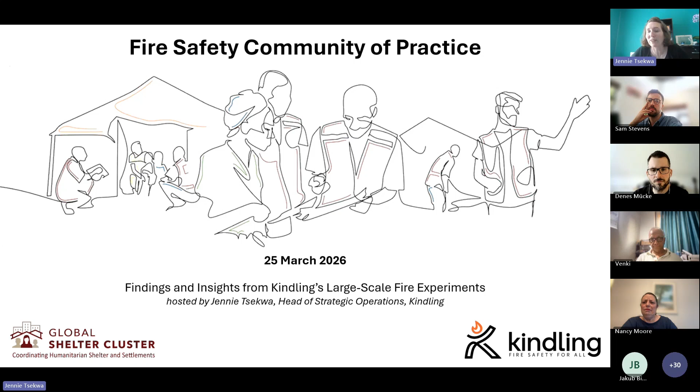Our director and founder, Danielle Antonellis, sends her sincere apologies. She's very sad that she's not able to be here today. She's unfortunately recovering in hospital after emergency surgery yesterday. Thankfully, she's doing very well, but she's unfortunately not able to be here today.

Just to quickly dive in, a little bit about the purpose of this community of practice: for those of you, like I said, who it's your first time, or for those of us who have been here for a while, just to remind ourselves, it's meant to be a space for collaboration. It's designed to bring together professionals from a wide range of disciplines within the humanitarian sector, as well as fire safety and fire protection researchers and practitioners. It was exciting seeing the many different places and disciplines you come from as you were signing up, and it really does feel that that mission of creating a space for these different disciplines is really happening today in a very real way.

So you will see, and Sam will say a little bit more about it, but whenever we give a presentation like this, we're always balancing the socio-technical aspects of the work. This particular COP is going to be a bit more on the technical side. I'm very excited for Sam to dive into the technicalities of the experiments.

We just give you that little bit of a disclaimer up front that for some of you, it might be your bread and butter, what you discuss every day. For some of you, it might be very new. But whatever the case, we hope that everyone on the call today will take away something of value.

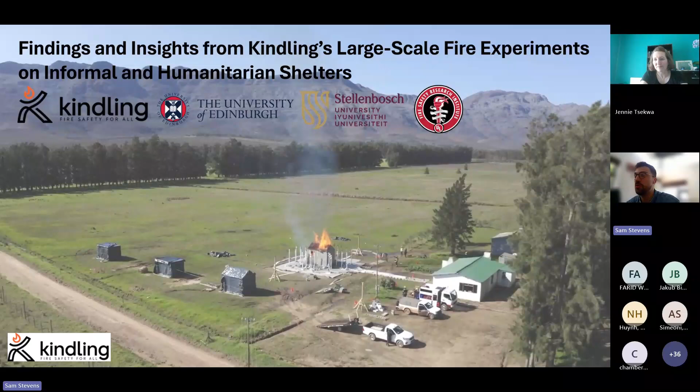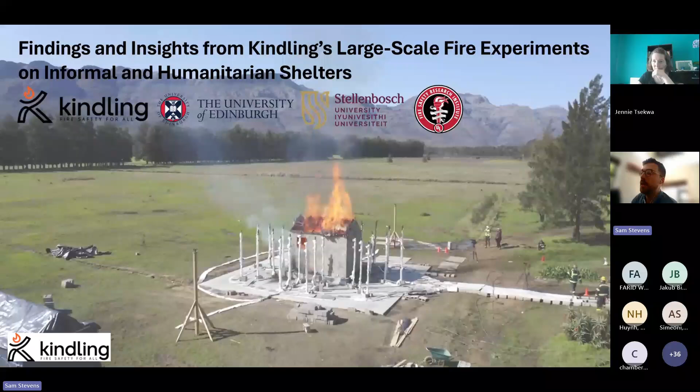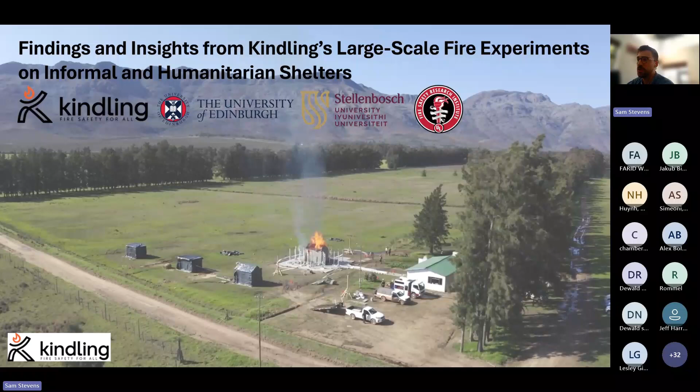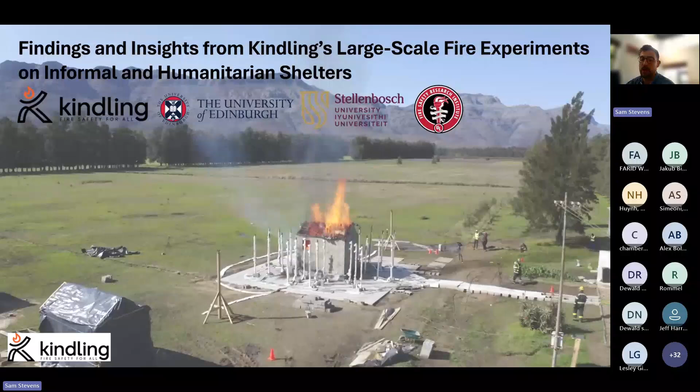This is the beautiful Western Cape, where about two years ago, maybe 18 months ago, we actually ran the bulk of our large-scale fire experiment program. This was led by Kindling, but it wouldn't have happened without key collaborators. We worked with Dave Rush from the University of Edinburgh—I think he's on the call—who was instrumental in planning the experiments and getting them off the ground. A huge number of people from Stellenbosch University were involved, including undergrad and PhD students, and Prof. Richard Walls from Stellenbosch, who was key in helping us source a lot of the instrumentation. And of course FSRI, who funded this work—we're very grateful to them. None of this would have happened without their support, both financially and in terms of all the work happening with informal settlements and the developing world more generally.

As Jennie's already mentioned, there's quite a diversity of you on the call, and I'm trying to squeeze a lot in today. So I'm hoping you can bear with me a little, and there'll be moments for some of you on the humanitarian end of the spectrum where it's quite heavy technical fire science that might go over your head a little.

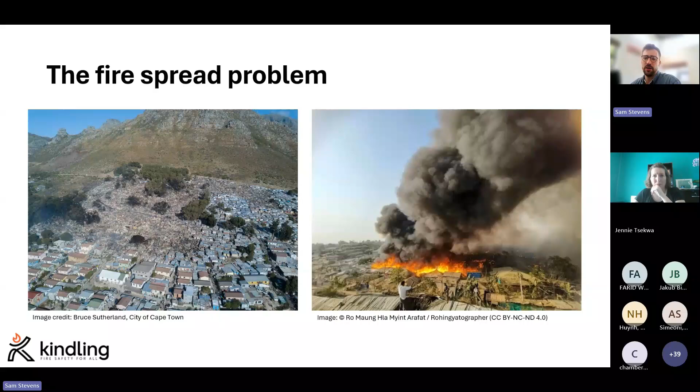Another context is refugee displacement camps, this example being Cox's Bazar in Bangladesh, where we have some of the largest refugee camps in the world, very prone to fires, but a different style of materials - a lot of bamboo materials and tarpaulin being used in that context. Very different to the sheet metal style of shelters we get in Cape Town, but very similar outcomes - mass shelter to shelter fire spread.

The way we conceptualize these experiments - before we can even think about conflagration at the scale of hundreds of shelters, we have to first understand the mechanisms that drive fire spread from one shelter to its immediate neighbors. We conceptualize this through the lens of fire spread risk, broken down into three parts. We need a hazard, which is a thing that can spread fire - in this case, a shelter that's on fire. There are different ways it can spread fire: high levels of thermal radiation, direct flame contact to its neighbors, or through the production and distribution of firebrands or embers, which may float further afield and ignite other shelters not in the immediate vicinity.

For these experiments, we were looking particularly at the short-range spread mechanisms - thermal radiation and flame contact. But just understanding how a shelter burns isn't any indication of whether a fire will spread. You need to know what the exposure condition is - usually how close the shelters are around it, and whether they can be exposed to the hazard shelter. Additionally, how likely is that target shelter to ignite, based on its own material properties and the ignition properties of the material it's made of?

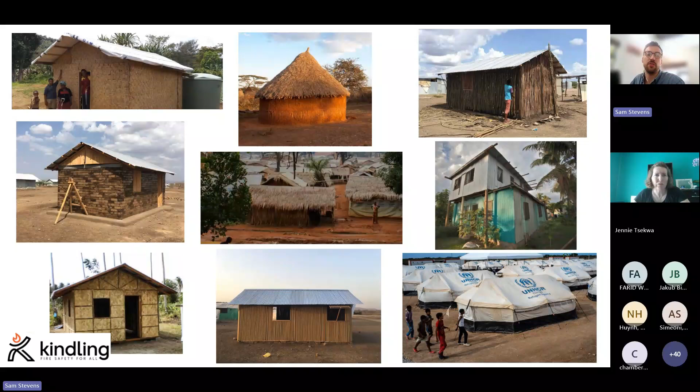So obviously we can't test everything. We're not going to test every single unique style of shelter. So one of the first parts of this work, going back 2 or 3 years, was actually trying to build a database of what shelters are actually out there in terms of materiality. So we spent a lot of time looking through UN reports, IOM reports, and a bunch of different documentation primarily from the humanitarian space that had images of different shelters and data on what materials they're made out of, how many doors and windows they have, how many stories they have, things like this.

We managed to get to a database of just over 450 unique shelters, taken from over 90 countries. So we're not restricted geographically. We've got shelters from Africa, Latin America, Asia. We've even got the refugee camps that we have in Europe captured in the data as well. So I think just about every continent is represented.

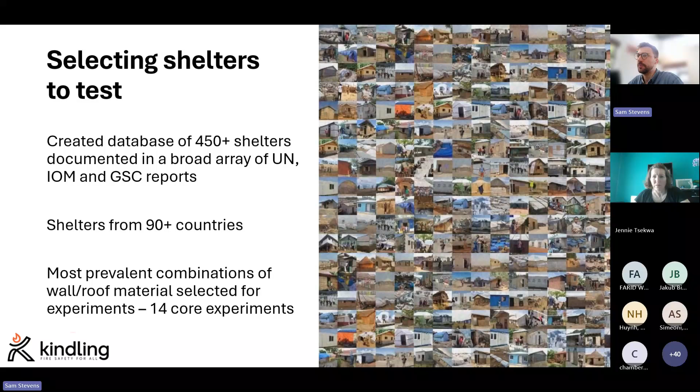And I don't mean the degree of combustibility, I just mean, is it a material that burns? So we have non-combustible wall with non-combustible roof, combustible walls with non-combustible roof, etc., etc.

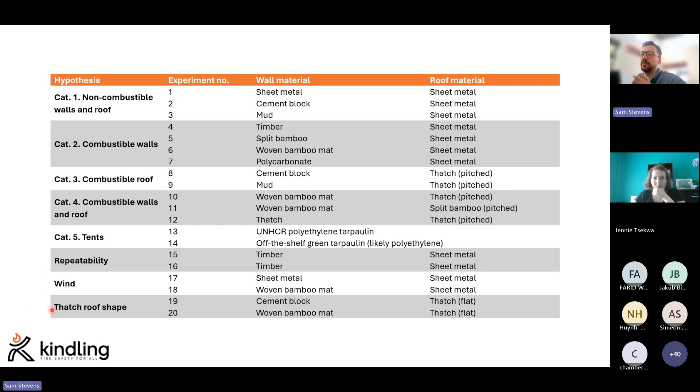And then there's 6 extra experiments that we did, looking at things like experimental repeatability. We had a couple of quite opportunistic experiments on wind, and then this is more of a niche kind of experimental process - how does the shape of a thatched roof affect things? So 20 big shelter experiments in total.

So what does a shelter experiment look like? Well, the first thing you'll notice here - I've been talking about fire spread, but in any single experiment, we were only burning one shelter and measuring lots of things about it. So every shelter had a floor plan of 3.6 meters on the long side by 2.4 meters, and it was 2.4 tall.

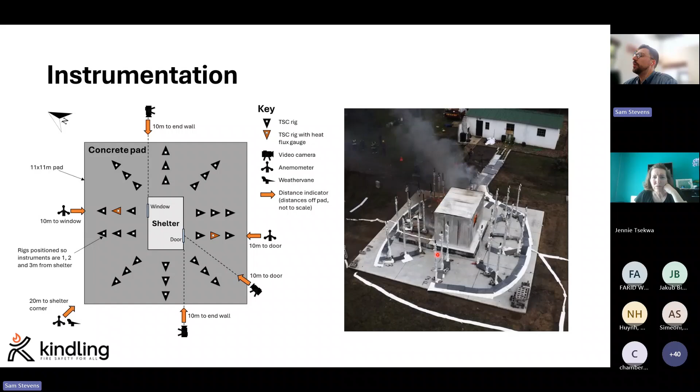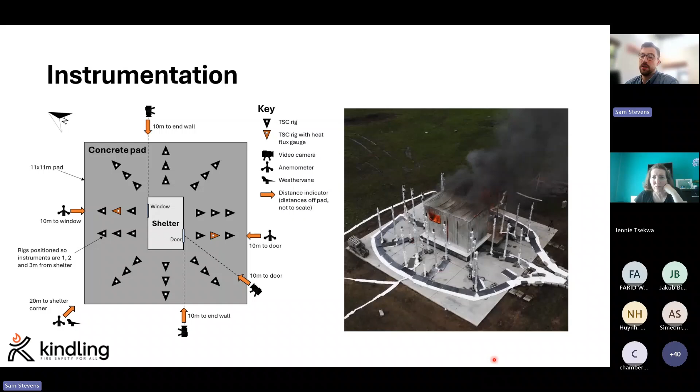They were all positioned on this platform here, which contains a 6-ton capacity scale. So we're measuring the mass of the shelter, which can give us mass loss rate, which roughly can help us analyze how much energy the fire is releasing over time - we call that the heat release rate. But if you're just measuring the mass, it's a bit of an approximation. It's not particularly accurate, but we can't do accurate heat release rate measurements in a big outdoor context.

I'll start with thermocouples. So inside we take a bunch of temperature readings with thermocouples just to understand the growth of the fire within the shelter.

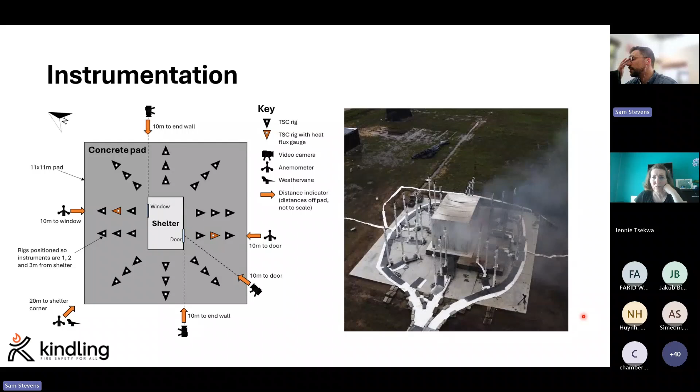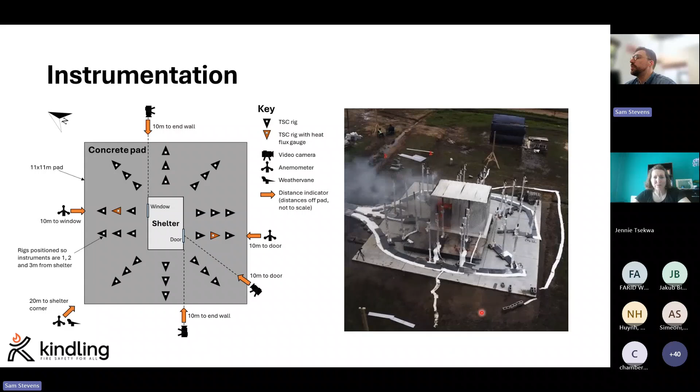Externally, what we're looking at is the dominant part of our test program: these instrumentation rigs here, each of which carry 2 thin-skin calorimeters, for a total of 60 TSCs for the full range of instrumentation. 2 of those are accompanied with heat flux gauges.

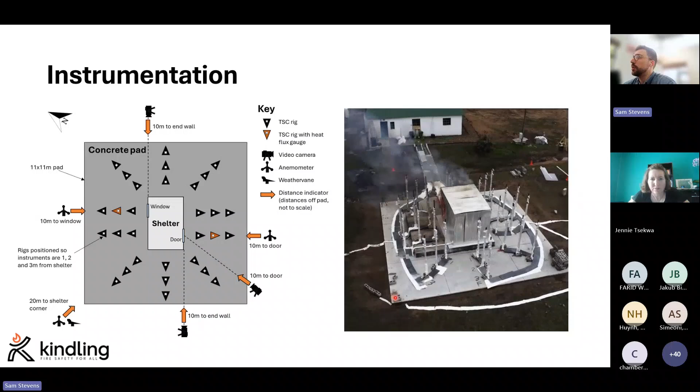And then we had cameras in various positions looking along the axis of a wall to view the flame extension from the openings, and various other cameras just in general views of the shelter as it's burning. The last thing to note, probably not in view at the moment, is we had 3 tall wind measuring instruments.

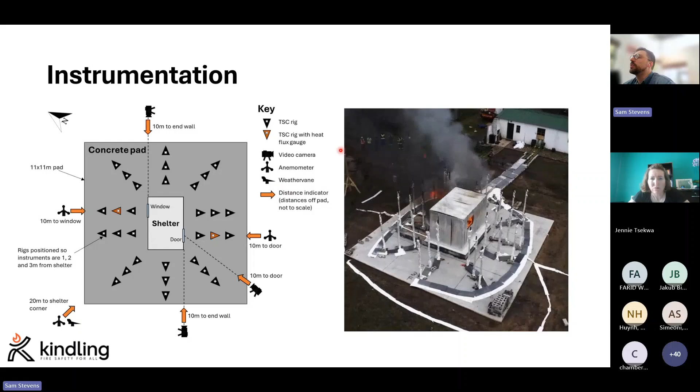One's just coming in here. So we've got devices measuring wind direction and wind speed on these, just in the general field around the shelter as it's burning.

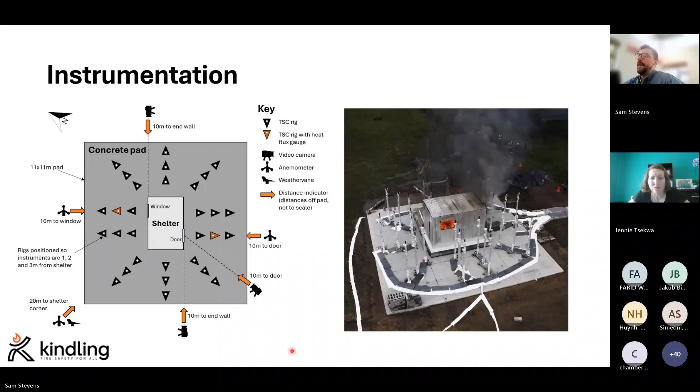So I mentioned these thin skin calorimeters are a core part of the testing program because they measure heat flux, and that's the energy transfer, the rate of energy transfer at these various positions away from the shelter. So if I'm standing in the position of one of these, looking towards the shelter, that's the heat that I receive.

TSCs are, if you're a fire experimentalist, you might be thinking, oh, they can be a bit temperamental, and you're right, they can, but they're cheap and they're easy to mass produce because each one is just a small square of this vermiculite. It's an insulating material with a little stainless steel disc with some thermocouple wire welded to the back. And really, they're not actually measuring heat flux. What they're measuring is the temperature, and then we have to back calculate heat flux once we have the data.

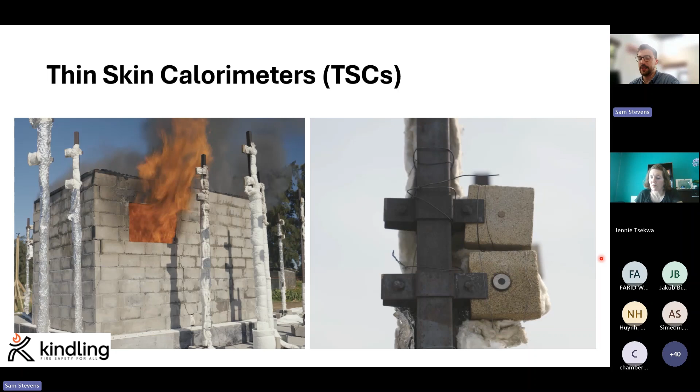Now, one of the critical parts of our program was pairing two of these, one 2 meters away from the window and one 2 meters away from the door, with a heat flux gauge. So we're equating the two and saying at this position, the heat flux that the heat flux gauge receives, and it's quite a high fidelity reading, is effectively equivalent to what the TSC is going to be seeing. In a moment, I'll explain how we then calibrated our entire TSC set to the heat flux gauge data.

The reason for this, and I'm sorry, this is my most nerdy technical slide, is the way that TSCs calculate heat flux. So the theoretical proper way to do it.

Sorry, this question's just come in. I think I might have a look. I'll answer that later. I'm not going to answer it now.

So yeah, there's this big complex equation that we have to satisfy and calculate to get the heat flux at the back. The problem with this equation is this little c here. This is a calibration factor that should be lab determined. You're supposed to take a bunch of your TSCs to a lab, put them in front of some sort of radiative source and calibrate them very carefully to get this one calibration factor.

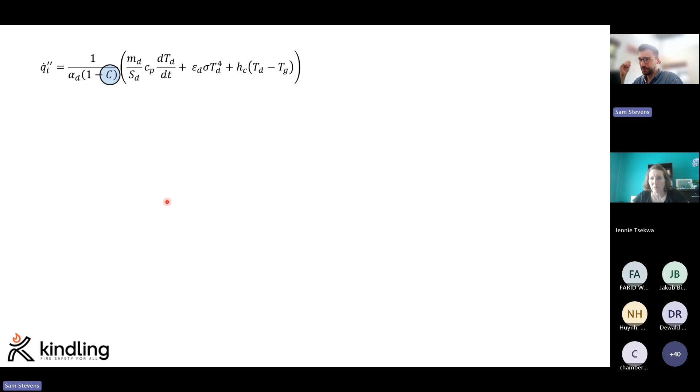Firstly, we didn't have the ability to do that. And secondly, even if we used a calibration factor that has been used for very similar TSCs in the past with the IRIS-Fire project that Stellenbosch and Edinburgh did, what we get across the full range of comparison between heat flux gauge and TSCs is a not particularly good prediction of the heat flux gauge data. Across all the experiments, we have something like 20,000 data points where we have a heat flux gauge reading and a calculated TSC heat flux.

And there's problems with how this was working. Notably, the TSCs were not good. This is the TSC data here, and the red lines are the gauge data. The TSCs were consistently not good at capturing the highs, the peaks of the heat flux, which is this region of this graph. And then also they weren't tailing off fast enough, so they were predicting too high heat fluxes for too long, which is this part of the data on the graph.

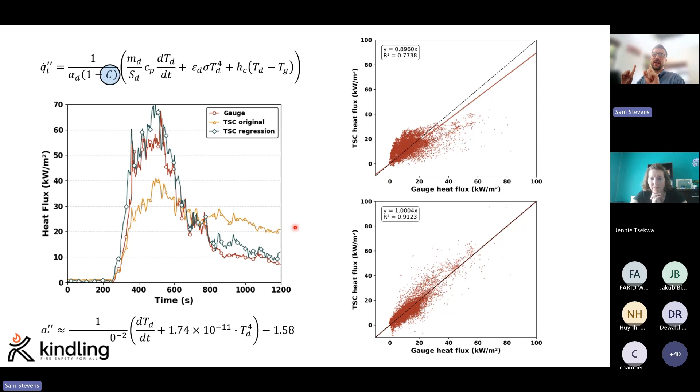So what we did is we ran a regression with the heat flux gauges against the TSC data and produced a correlation that much better fit the TSC data to the heat flux gauge data. As you can see, in this particular example, our TSC line here, the blue line, is generally fitting the heat flux gauge data in a much better way. So for those of you in the more fire science end of work, that's how we calculated TSC heat fluxes for our full range of TSCs.

Now, fuel load. This is going to flip from what I was saying before. Fire scientists, you probably will be bored now. If you've worked in experimental fire research, you'll know what a wood crib is and why we use them. But to those of you in the humanitarian sector, this might look a bit weird. When we talk about a shelter on fire, a large amount of the fuel that's burning is not the shelter itself, but the stuff that's in the shelter. So that'll be people's belongings, furniture, whatever.

This does not look like furniture or people's belongings. This looks like two piles of wood. You're never going to have this inside someone's real home. But the reason we use these experimentally is they give us a very good way of being highly repeatable in the fire that we're producing. Two wood cribs built in the same way should produce a very similar fire to one another, which means every time we're testing a new shelter, we're exposing it to the same internal fire as the last.

And the other side of it is that we can replicate the total thermal load that we would expect in a real shelter, and we can replicate the amount of energy in an equivalent amount of timber, and that's what we do here. So we found data on fuel loads, converted that to a required amount of fuel for our shelters, and turned that into wood cribs, and we get a nice repeatable fire.

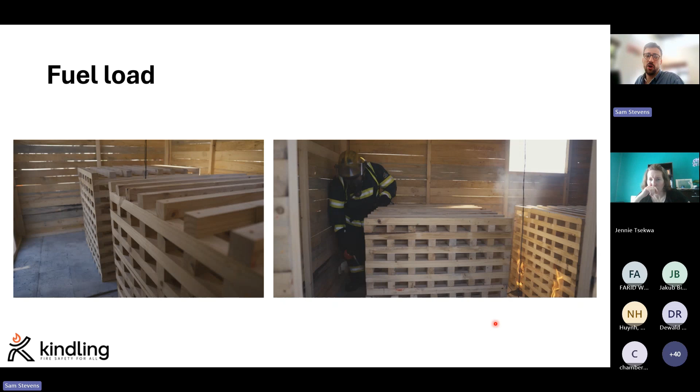Each fire would start by our firefighter here igniting sort of 8 small igniter packets just to get the cribs going. But yes, that is why we burn a massive amount of timber inside and not things like sofas or chairs or mattresses or whatever.

Okay, so quickly just to cover some of the initial findings. So this was data as we presented it at some conferences last year. And this is really just the quick high-level findings of hazard. How does a shelter burn? What kind of immediate heat fluxes is its environment being exposed to?

So the next 3 or 4 slides, what you're going to see is a shelter burning at the top. Down here, we've got what we call a heat flux map. So we're taking our heat flux data, plotting it spatially as time progresses. And you're also going to see the mass loss rate, which, as I said, we're kind of equating to heat release rate. But as a comparison between shelters, it just gives us an idea of how much and how fast the fuel is burning. So I'll just run this first one.

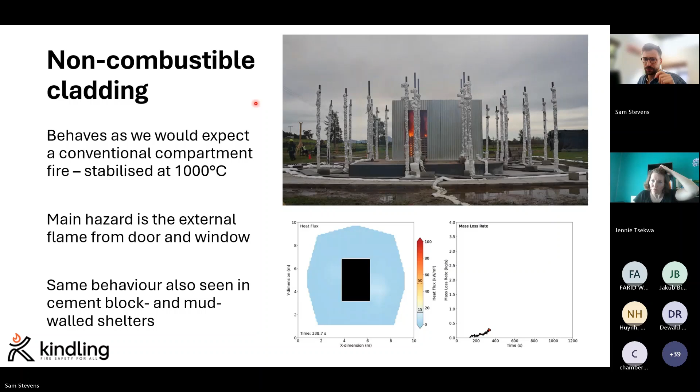And this is our kind of nice base case sheet metal shelter, very much of the style we get in Cape Town and other places. And this, for the fire engineers among you, behaves as we would expect a fairly conventional compartment fire to behave. So we get a slow growth period, then we hit flashover, which is our accelerated fire growth, and then after that, as indicated by the heat flux data, our door here at the front and our window at the back, where we've got those openings, there's flames extending, obviously providing a lot of heat to the environment there.

But you'll see we hit this sort of steady state where we were losing about half a kilo a second of fuel. And this is kind of consistent for any of the shelters we did where we had what we call non-combustible facades. Even if there's a timber frame holding this thing up, we've got sheet metal on the outside. The other shelters we did were cement block and mud walled shelters. And we get a fairly consistent hazard profile of a normal compartment fire and then external flame from the door, the window.

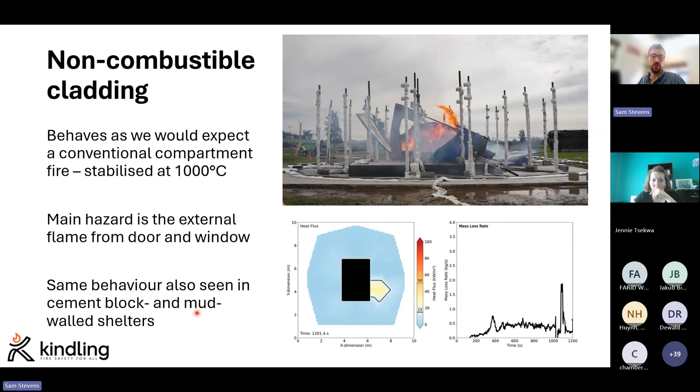But when you add in combustible materials, we've done 2 things. We've added fuel that can burn, so we're expecting a higher mass loss rate. But then we've also put some of that fuel on the external face. So we're going to expect burning on the outside of the building. So I'll run this.

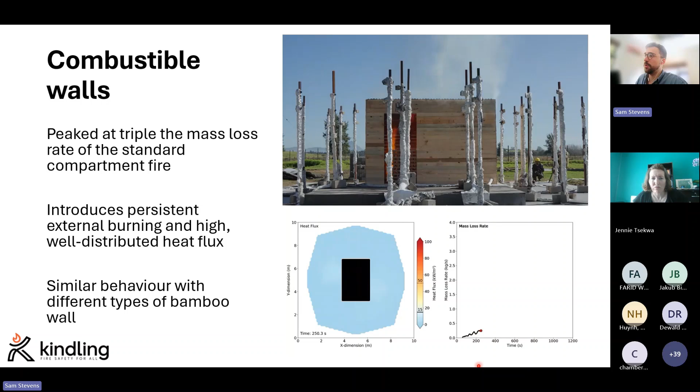Immediate key findings, you'll see in a moment, but the mass loss rate is going to peak at about triple that of the conventional compartment fire. Instead of having high heat fluxes exclusively located where the door and window are, you'll see we've got this much wider distribution of high heat fluxes in all directions, right?

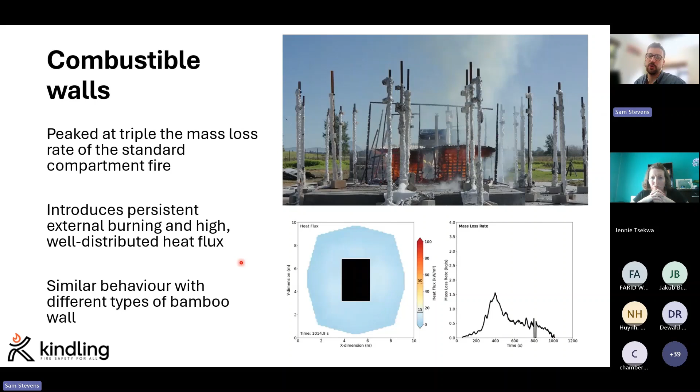Now, this is our timber shelter. We did see some similar behavior, not fully identical. There's a difference in the rate at which they burn, but we saw similar behavior with a bamboo mat material and a split bamboo material, where the fire transitions to the walls, they burn away, but expose everything to quite high heat flux in all directions.

Back to my laser pointer. I love it.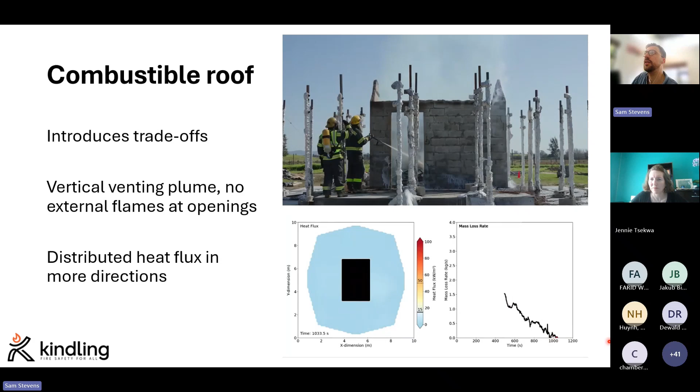And then the last one I want to present to you in this format is the combustible walled with a combustible roof shelter. And I've isolated this one particularly as probably the highest single hazard that we saw in the experiments. I'll just run it.

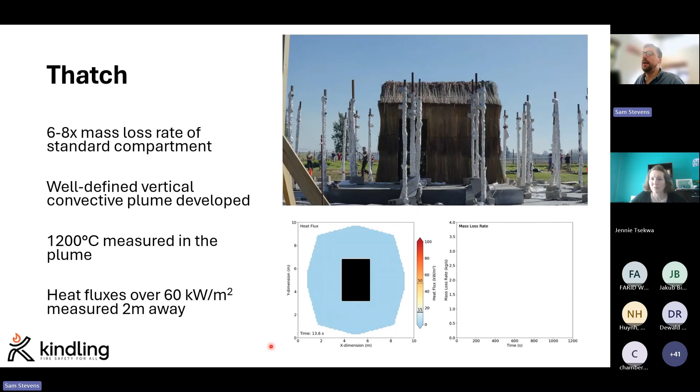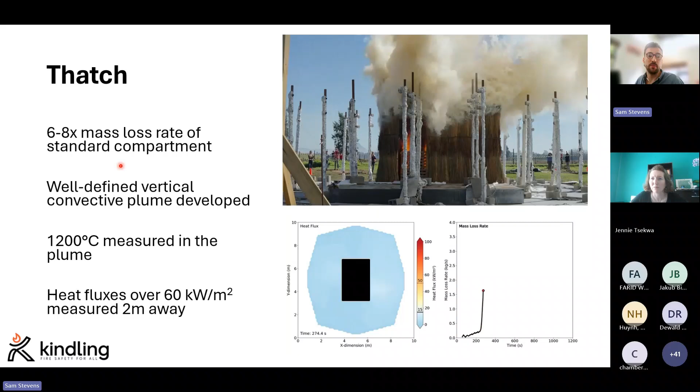So things you'll notice, so look for the mass loss rate to spike to a very high level. So we're talking 6 to 8 times that of the compartment fire, which means we're consuming 6 to 8 times the amount of fuel, which likely means we're releasing 6 to 8 times the amount of thermal energy to the environment. In this case, we had a very well-defined vertical plume. We have very high heat fluxes in all directions. We were measuring gas temperatures of 1200 degrees within the plume.

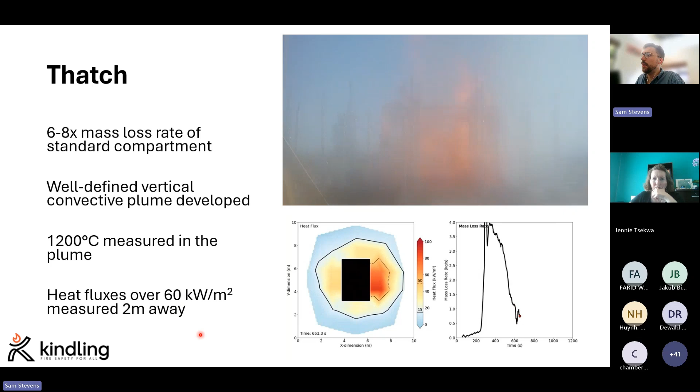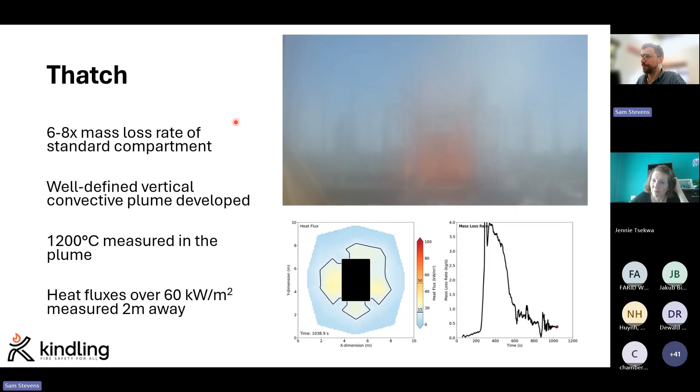And perhaps the biggest indicator that this was a hot and dangerous fire is that we melted or damaged our camera that was sat 10 meters away. And I don't know what happened, if it distorted the lens or something, but a hot fire, you could really feel it. The highest single hazard that we measured.

But I want to come back to this word hazard. I keep saying hazard, and I'm being very particular about that. From knowing how a shelter burns and what levels of heat it's releasing, all we're saying is how hazardous that single shelter is. The next thing we need to do is connect that to vulnerability, because different materials have different levels of vulnerability, and so are going to ignite at different speeds under different conditions.

So the other side of the work was we were working with a commercial lab in Cape Town who had a cone calorimeter. Again, fire scientists, you can probably switch off this next part. But for those of you who aren't familiar with a cone calorimeter, what we do is we take a small sort of 10 by 10 centimeter sample, so it's not large. We place it in a sample holder. It sits underneath

the reason it's called a cone is this heating coil is conical, and it's an electric coil that heats up, exposes our sample to whatever level of heat we want it to. And then we also have this pilot spark here, which constantly sparks, as you'll see in a moment on the right-hand side. Now, as the material is heated, it starts to pyrolyze, it releases fuel gases, they mix with oxygen at the surface of the material, and that spark is providing energy to cause an ignition.

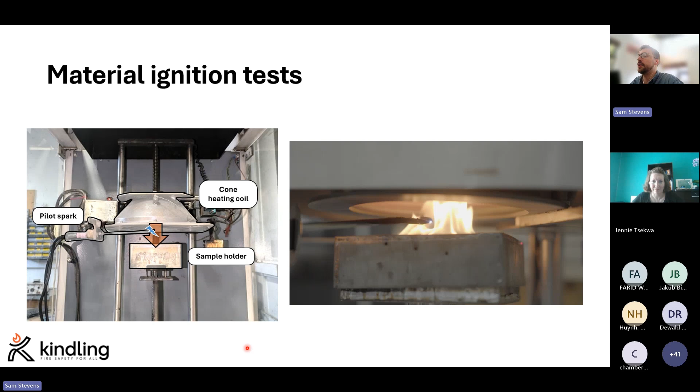Now, if I pick a particular material, the way we've done it is say we've got threshold times, so every 2.5 kilowatts per meter squared, it takes X number of seconds to ignite. If I then compare that to my heat flux profile and see that a certain threshold has been exceeded for a sufficient amount of time, then we flag ignition and we say ignition for this material at this location would have happened in this time.

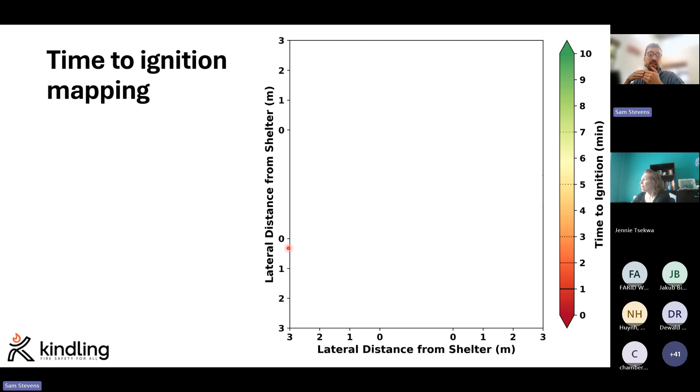The first thing I have to clarify is time to ignition in this sense. We've obviously had to pick a reference point. So we're taking the start of flashover as the reference, and we're saying if the origin shelter has started flashover, how long does it take after that until it spreads to its neighbors?

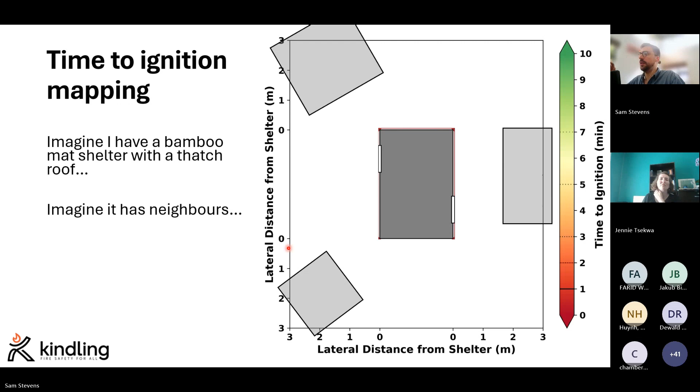I want to give a visual example. Consider we have a shelter—let's say it's the experiment with the bamboo mat wall and thatched roof. Imagine it has some neighbors in its immediate environment. We can then plot all that time to ignition data calculated from our heat flux data and material ignition data.

I could start observing things like, if I had a neighboring location here, imagine it has neighbors and they're all the same material—bamboo mat with a thatch roof. So I use the bamboo mat as my most vulnerable material. If I have a shelter positioned here, sitting comfortably in this nice big red zone, that corresponds to it igniting within a minute of the first one hitting flashover.

And if this one were sitting here, it's on the borderline—just on the edge of where it could spread fire within a minute. But outside of that, if it was just a few centimeters back, maybe it wouldn't have ignited at all. And this one, yes, it looks like it could ignite, but maybe somewhere in the region of 5 to 7 minutes.

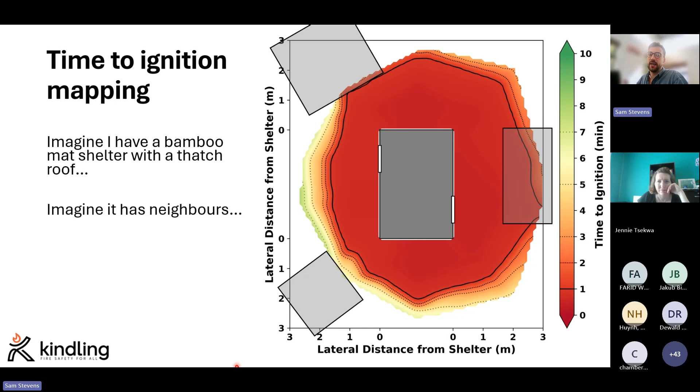So this is just to give you an idea of what this data actually means. But with this frame of reference, we can think about changing materials. We had an experiment with a bamboo mat wall with a split bamboo roof, so let's say I change my hazard data—that changes the distribution of ignition times.

So this one is still within the 1 minute zone here, still has a big overlap with it. This one is maybe pushed back—it would still ignite, but only after 7 minutes. And then this last one here, no ignition at all—it doesn't sit in the ignition data.

I could even extend this and say, what about these neighbors? What if I change their material and say, actually, I think they're made of timber, not bamboo mat? That changes the way we process the data again, and it shrinks that time to ignition region even more. Now we have two sitting outside the ignition zone, and one potentially still igniting quite quickly.

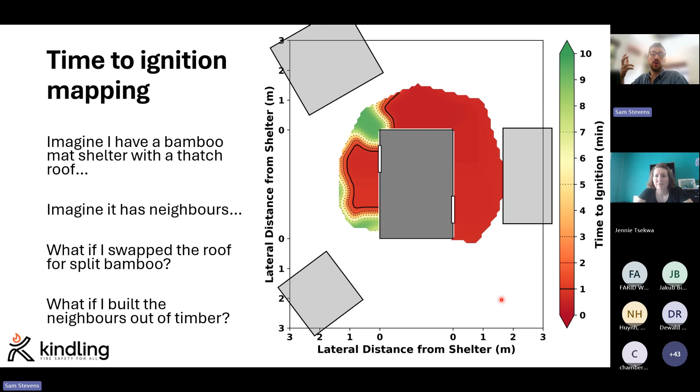So hopefully that gives you an idea of what this data means and what it's saying. From this, we've got some fairly valuable insights. The first is maybe something we already expect, but with these non-combustible materials—in both these cases I assume timber is the exposed material, but for argument's sake...

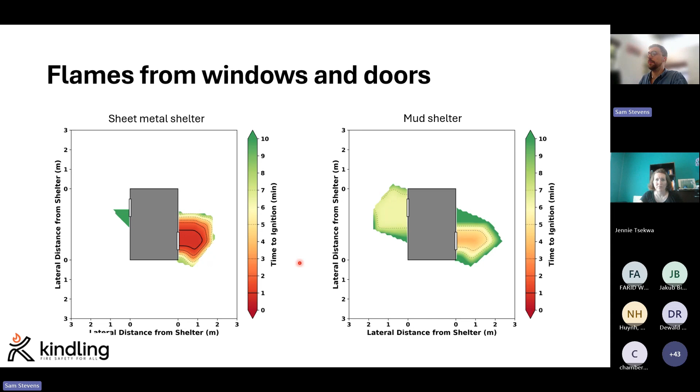...a sheet metal shelter—this one was slightly impacted by wind, so we had slight flame extension out of the door rather than the window. But generally speaking, if we have these non-combustible facade shelters, the location of openings is your really important point. You're always going to have external flames from any open windows and doors, and it's in the immediate vicinity of those where you're potentially at risk of fairly rapid fire spread times.

We move on to combustible wall materials—now this is the three, bamboo mat, split bamboo, and timber, that I want to talk about.

That is it, Deward, about wind flows. Great question—I'm going to come into wind in a moment.

Bamboo mat as a material is very ignitable. We saw that from our cone calorimetry testing, but also in the shelter test, when it hits flashover, the walls burn away extremely quickly. So you have a very short, sharp, quite extreme hazard peak. You have a very ignitable material, which means over short distances, very quick fire spread. So for our bamboo mat wall shelter, we have a fairly large vicinity around it, sort of 1 to 2 meters, where we're expecting fire spread within a minute of that first shelter flashing over.

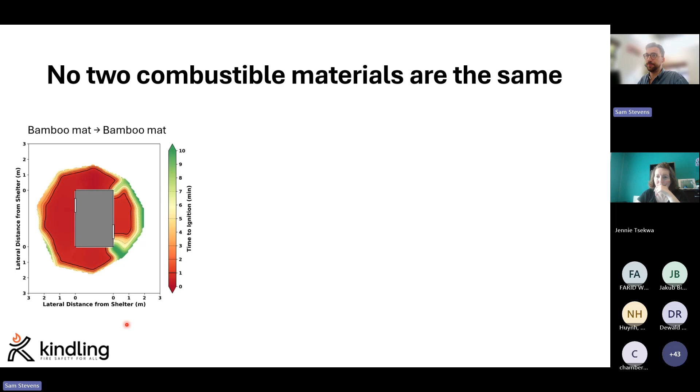Compare that with the split bamboo material we used. It wasn't as easy to ignite. It took longer for the fire, when it hit flashover, to transition to the external walls. So we get data that, okay, close by the door and window we're still talking sub 3-minute ignition times, but then we have this nice decay, and a bit further away, ignition might still happen, but it's going to take 7 to 10 minutes, a lot longer. So even though these look like similar total areas around these shelters, we have to take into account that fire spread rate is a very important thing. The bamboo mat has the potential to spread fire a lot more quickly, despite the fact that we could look at these two materials and say, well, they're both combustible, they're both bad.

The other comparison is timber, which sits nicely between these two. We'd see fairly rapid fire spread to a neighboring timber shelter. If it's up against the front or back wall, we're talking 2 to 3 minutes, and then quite a wide range where you'd expect ignition after about 3 minutes. But again, beyond 1.5 to 2.5 meters, we start to be in the realm where it's probable that fire might not spread at all.

Now, thatch I want to talk about. Thatch, again, we identified as a very high hazard, and this data got me questioning things. I have time-to-ignition data at every single point in the measured space. My TSCs were only up to 3 meters away from the shelter, and I filled that entire space with data that says yes, a neighboring thatch shelter could ignite here. So I have to ask the question: is it possible that further away I could ignite a thatch shelter?

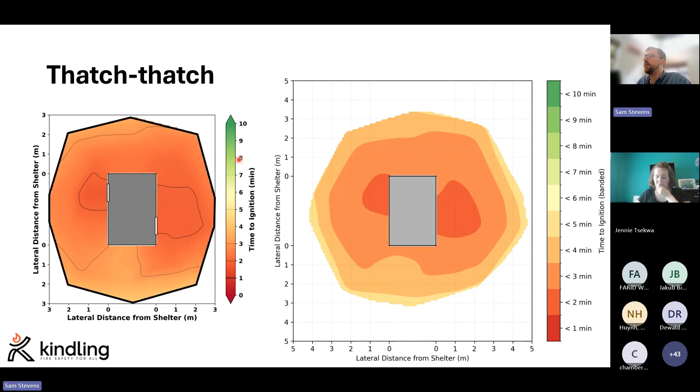This is the same data, just slightly less clean, and I haven't quite correlated the color scale. This is exactly the same data on these two plots, just showing further distances on the right-hand side. So theoretically, we're looking at fire being able to spread between two of these thatch shelters at over 3 meters, pushing 4 meters, getting close to 5 meters. So we're starting to talk about fairly serious separation distances if the goal is complete prevention of fire spread.

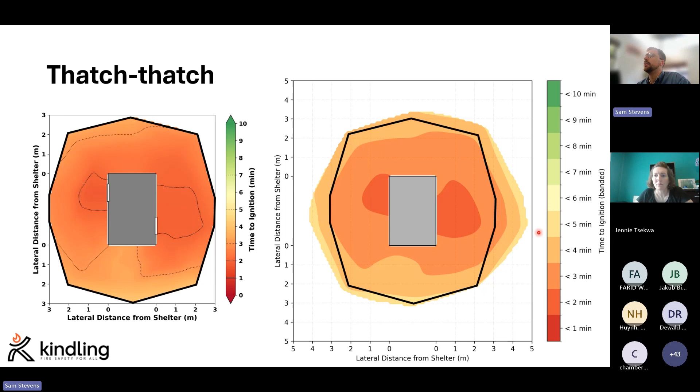And then the final thing I want to land on is the idea of fire spread risk as a concept in the first place. What do we actually mean? Because the separation distance can do two different things. In the case of our bamboo mat wall, what we have is an immediate area of very, very fast fire spread. But after that, because the walls have burned away quickly, there's a pretty steep gradient to the point where there's no fire spread at all. So if you imagine a shelter here versus a shelter here, our experimental data is saying this one's going to ignite in a minute, this one's not going to ignite at all. So it's a very fire-spread-rate-driven problem.

Whereas for the thatch, and I've just got the 3-meter data up here, but I've shown you potentially we're looking at fire spread distances over 3 or 4, maybe even 5 meters. It's a distance problem. This shelter is not dangerous because it can necessarily spread fire quickly—we actually see it takes longer to spread than for the bamboo mat shelter. But it's a big risk because it can spread fire far. So there are two different angles at which we can look at separation distance as a mechanism for potentially reducing fire spread risk.

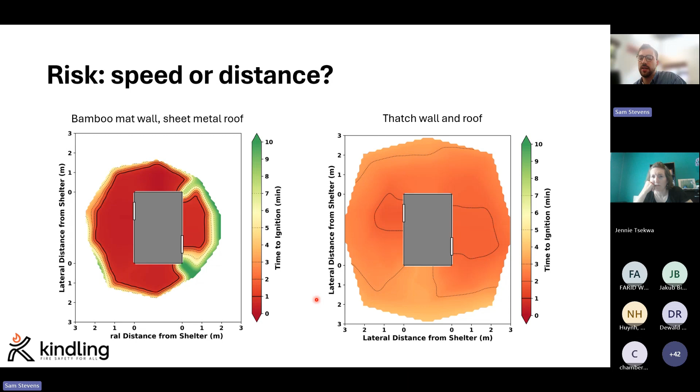Thanks for the question, Venki. I see you're asking about contents inside the shelter. I'll hopefully answer that at the end, but I'm not going to come back to it now.

Quick conclusions from these time to ignition maps. If we have non-combustible facades, locations of windows and doors are very important, since external flames from the openings are going to be the main drivers of fire spread.

Secondly, combustibility and ignitability are not equal concepts. Lots of things can burn, but they take very different amounts of energy to ignite. As I showed with the two bamboo materials and the timber, two different combustible materials can give very different outcomes. In extreme cases, like our thatch case, fire could spread beyond 3 meters, potentially 4 or 5 meters.

With that in mind, separation distance is not necessarily a silver bullet to the fire spread problem. It's something we can leverage to reduce risk, but for example, 20 centimeters of extra separation distance won't give the same benefit in different contexts. In some cases it might be the difference between very fast fire spread and no spread at all, while in others it might only delay spread by a few seconds or minutes. It all depends on the materials the shelter is made from.

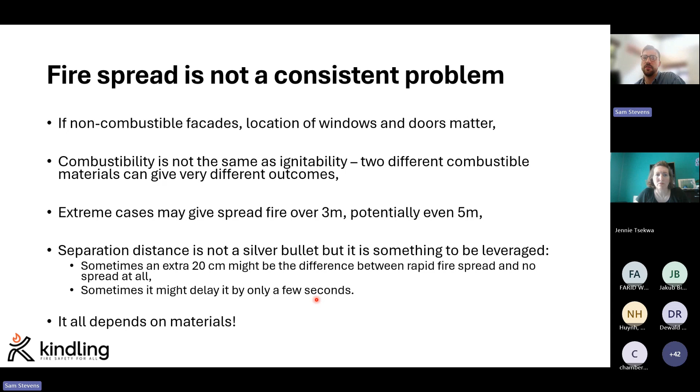But what is not included in this analysis yet? Deward, you were onto something, because now I'm going to talk about wind. All the experiments I've discussed so far were conducted in what we consider low to no wind conditions, roughly 0 to 2 meters per second. On those days it didn't feel windy at all. But wind is very powerful.

On a couple of days when we hoped to test, we had extremely high winds that kept blowing our instrumentation over. The big tall rigs got knocked down, we stood them back up, supported them with heavy cement blocks, and they blew over again. Eventually we realized this wasn't safe to measure data in, but we still wanted to see the impacts of wind on a shelter, so we stripped back all the instrumentation and burned them anyway.

This was the result. We repeated our sheet metal shelter test on a day when wind speed averaged about 5 meters per second, with gusts up to over 11. It was quite turbulent, with the flames fluctuating a lot, but we got external flame extension up to about 3 meters.

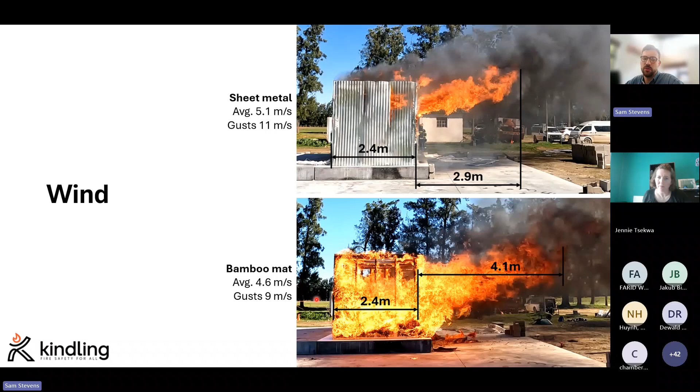Dan asked a great question: were we able to collect mass loss data? Yes, but it's horrible and super messy, because the wind played havoc with the scale readings. I can't remember if I tried processing it, but the noise in the data was far too high to get anything meaningful.

We also found that wind, even at lower speeds, is still significant. We might not call it wind per se, more a gentle breeze, but we set out to do some repeatability testing on our timber shelters. I think we did three of them; I'm going to show you two, the lowest wind speed and the highest wind speed.

Fortunately, these all occurred with wind in the same direction, which was pure luck. The difference was just the wind speed. On a very low wind day, the door side showed flames projecting about 1 meter from the door, and the window side also showed flames projecting about 1 meter. The heat fluxes noted here are the peak heat fluxes at 2 meters away, as measured by the heat flux gauges.

So the story here is really quite a symmetrical fire. The hazard is pretty equivalent on either side.

But then we go up to 1.74 meters per second wind speed. Again, it's not windy, still just a breeze on the ground that day. I would have said it's not windy at all, but it's still enough to impact the fire.

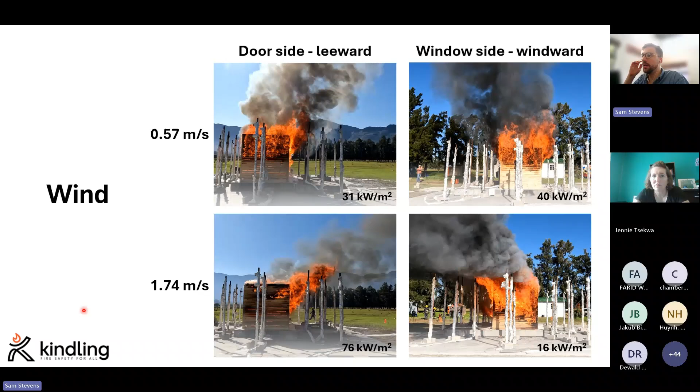The other note of caution is firebrands. We didn't do anything in these experiments to quantify firebranding. There's a lot of research out there on firebrands, very good research, but not necessarily any of it applied to informal or humanitarian contexts yet. Unfortunately we just weren't resourced to measure it. There are many steps in the process: looking at production potential, how many firebrands are being produced, how they're distributed, how far away, and then how something ignites in response to firebrands landing on it. We didn't have the resources to do any of that, so there's a lot more research needed in this space.

I think what we can say is it was very obvious which materials were producing them—namely the bamboo mat material and thatch material produced them in high numbers. As I say, not something we've quantified, but something to be aware of as a hazard for some materials potentially.

Then I want to take a bit of a left turn to say, what are we hoping to do with our time-to-ignition data? The latest work we're doing is trying to develop a settlement-scale risk model using the experimental data to visualize how fire spread risk can play out at the grander scale. We're looking at a completely virtual settlement, and the model is very much a work in progress at the moment, so don't read anything into what you're seeing here, but we want to look at the grander scale.

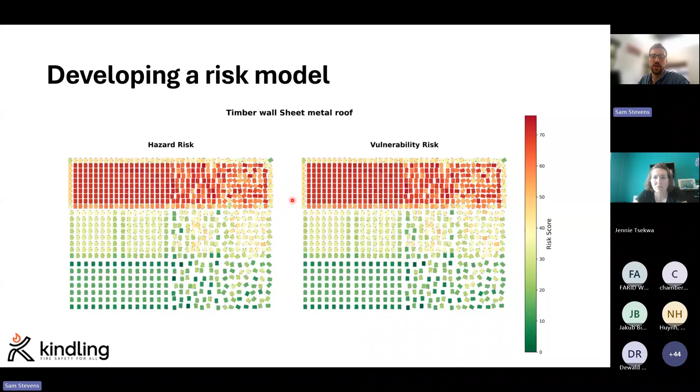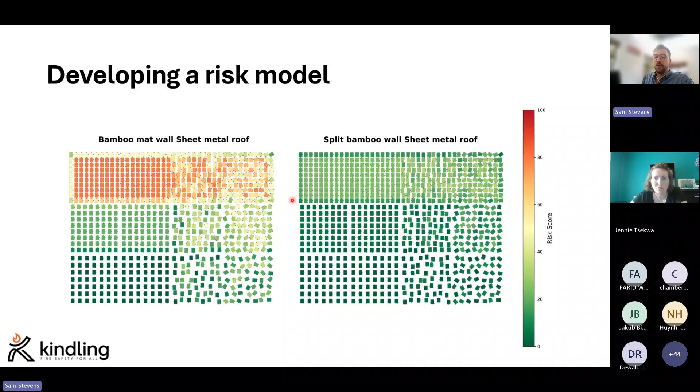What if we change separation distances? What if we change where the openings are located? What if we change how shelters are oriented relative to one another? And how that changes the fire risk score metric we're trying to develop at the moment. Then, of course, the other comparison is how material impacts fire risk in this—if I change one material to another, what is the tangible, quantifiable impact on risk in the settlement overall? As I say, work in progress. Hopefully there'll be more in the coming months coming out of Kindling about that.

So I'm going to park the large-scale experiments for a moment, because I'm sure some of you in the humanitarian sector might have been screaming at me this entire time saying, what about tarpaulins? It's good news and bad news on that front. The good news is we've tested some. The bad news you'll find out in a few moments.

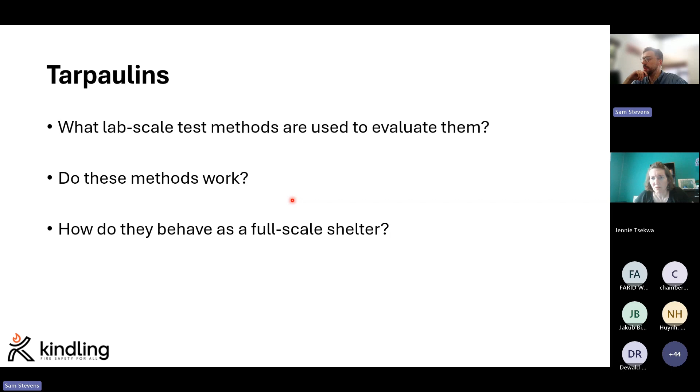But for me, as a fire researcher, I had never really confronted tarpaulins before. Coming into these experiments, there were a few questions I had. In the documentation, I'm seeing that tarpaulins are being given fire certification based on some test methods. I wanted to know what those test methods are, and do they work? Does the evaluation of materials hold up? And then how does the tarpaulin behave when we put it in a shelter scale and burn a tarpaulin tent? So there are two test methods that are used.

Some of you are probably familiar with these. We've got the single burning item test, or as you may know it, EN 13823, whatever it's called in the country you work in. We also have the CPAI 84 test. It's not a construction industry standard, it's been developed and used by the textiles industry. However, it's almost identical to the ISO small flame test. If you're familiar with that, they're very similar apart from some tiny differences. For today, I think it's useful to just equate them to one another.

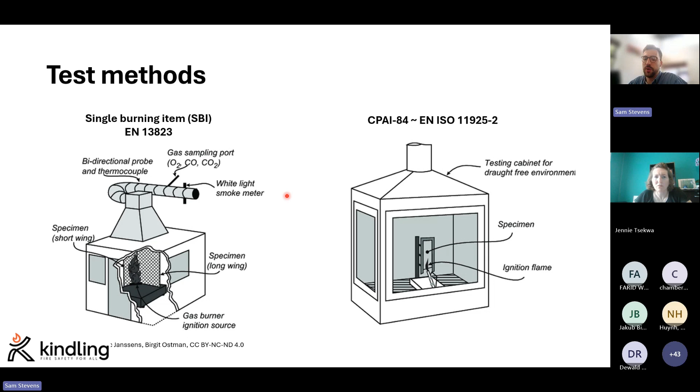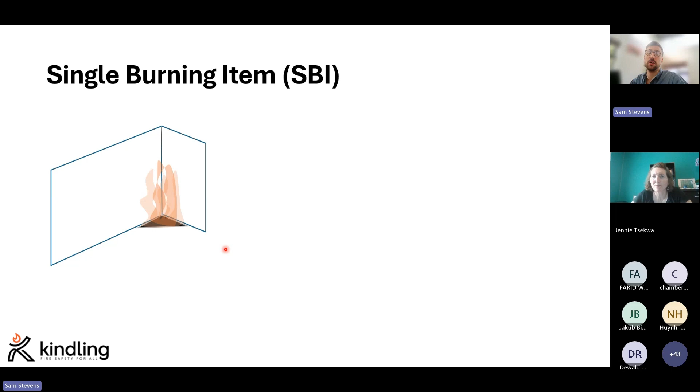So firstly, the single burning item test. For those less familiar with it, we take a large sample of the material—exact dimensions have slipped my mind, but I think it's something like a meter by a meter, and 0.5 meters by a meter—and we have two panels of the material. That material is exposed to a very well-defined gas burner, so we know exactly the size and heat release rate of that little fire. Among other things, the test looks to quantify the material's response in terms of whether it propagates fire spread along the long wing, whether it produces smoke, and whether it produces lots of burning, flaming droplets dispersed in the environment.

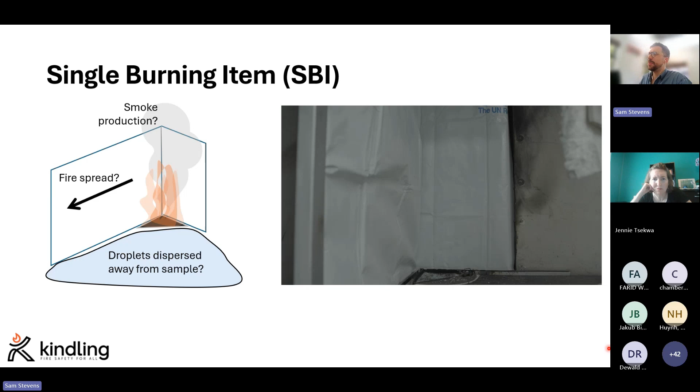So this is what it looks like. This was one of our samples tested—a UNHCR tarpaulin with fire retardant in it. This is a bit of an awkward camera angle, but it's one of the best we have, looking along this way. If this is the short panel here, that's this short panel here, and this is the gas burner. So initially, the gas burner is ignited.

And what we saw with the tarpaulins we were testing was really not much. The material tends to shrivel and warp when exposed to heat, and it moves away from the sample. I think we did six or twelve repeats of this material, and six of another tarpaulin. In almost every single case, this is exactly what would happen—the tarpaulin would warp away from where the heat was, and you can see the exposed board behind it.

In one case, a small flamelet did manage to establish on the damaged edge of the tarpaulin, and very slowly, over a period of about 10 or 15 minutes, this long panel slowly burned away.

But generally speaking, all of these samples did this, and because of that—I won't go into the details—they all would have received a pretty reasonable classification, as in this is a fairly fire-resistant material. But I have to look at this and challenge it and say I don't think a good rating is necessarily an indication of the material's performance. I think it's an artifact of the way the material moves away and sits there not being exposed to very much heat for 20 minutes, because it's moved away from where the heat is. So again, I come away from this with more questions than answers.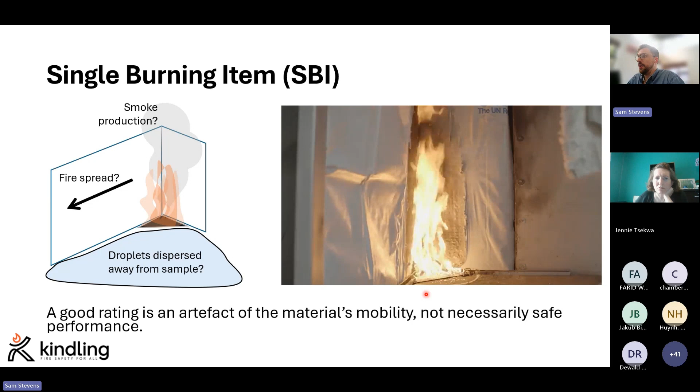So the next testing method, CPAI, is essentially a foot-long strip of material clamped in the sample holder and exposed to a very small flame. The principle is you expose it to a flame for, I think, 12 or 15 seconds. The idea is that when the flame is removed, the sample should self-extinguish—it shouldn't propagate the flame any further.

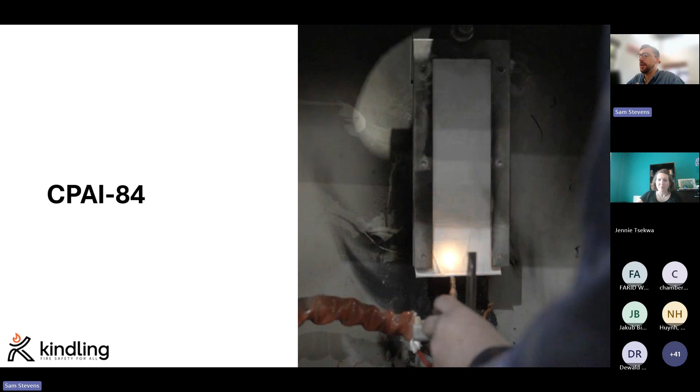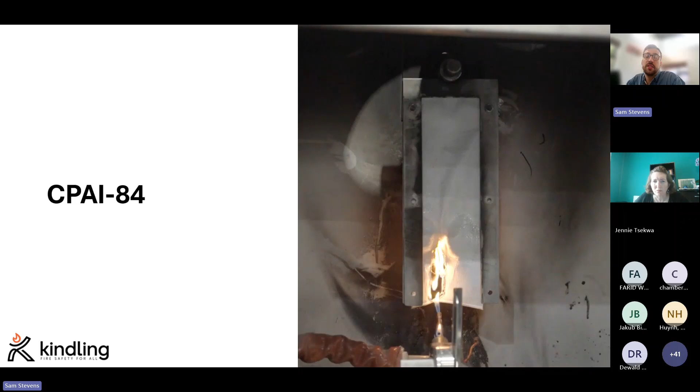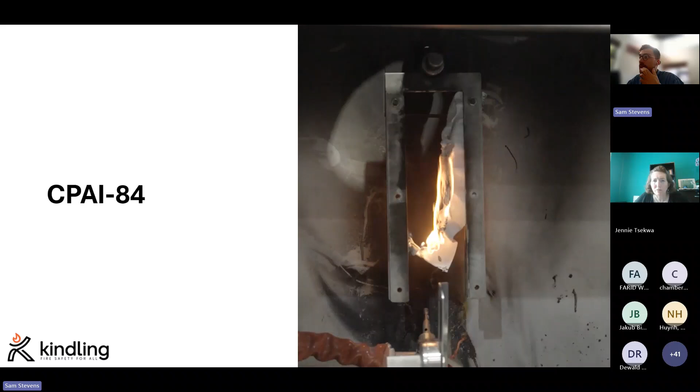So here we have the flame being applied to the sample, and within a few seconds it seems like there's already flame fairly well established on the sample. Now, this is the same material we saw in the SBI test, where when it had the ability to, it just moved away from the heat. Here, where it's held over the heat and it does catch, we had this sample being destroyed in like 20 to 30 seconds. And again, we did a bunch of repeats—I think eight in this case.

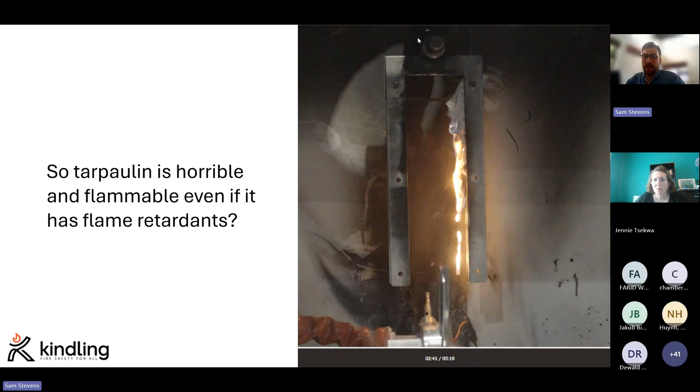In every single case, the flame established and took over, and the sample was entirely burned away. So now I find myself in the position of asking, is this tarpaulin just horrible and flammable, even if it's got flame retardants in it? Because this tells me the material has failed and shouldn't be used as a safe product.

But then let's scale up to the shelter and do a shelter experiment exactly the way we did everything else, by setting the fire on the cribs inside and watching how the shelter behaves. So are we going to see behavior where the material just moves away from the heat, or are we going to see it igniting and taking hold? That's the interesting question when I'm watching this footage.

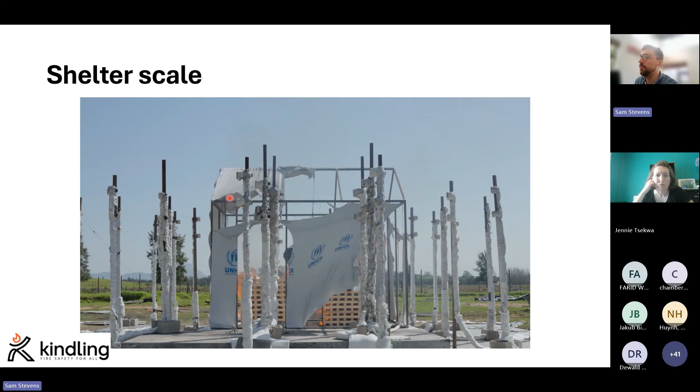You'll notice that you can still see a lot of untouched wood in the crib. This is still a very small fire relative to what we've had in other cases. The crib is not even fully developed, and we basically don't have a shelter anymore, right? We're losing all our walls. Maybe the optimist in me says, "Oh, none of it's ignited yet." Well, that's great. And I don't tend to be optimistic, having seen these experiments.

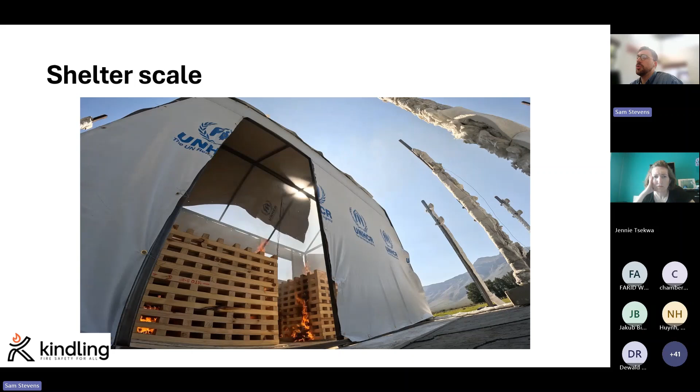Now, from our thermocouples, the temperatures of the smoke were at about 200 degrees Celsius, which in fire terms is not particularly high. And so we're seeing the shelter, the tarpaulin, being compromised very early on, but not igniting, potentially.

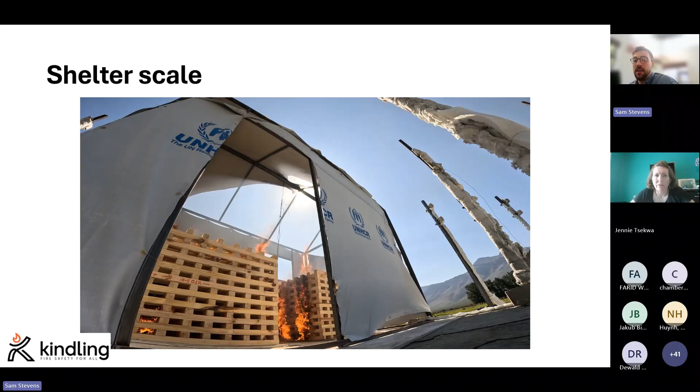Dave, I just noted your question in the chat. How does fuel location in the shelter impact the ignition of the wall materials? That's a very good question. And that brings me on to my conclusions about tarpaulins, which is really that we don't know enough yet. It's a case of, if the fire starts on fuel in the shelter, does it ignite the tarpaulin early enough and at low enough exposure? Because you saw we needed that very small flame to gradually get the ignition going. Whereas if you suddenly expose it to a lot of heat, I think its tendency is to move away from the heat source.

So when I said I had bad news on the tarpaulins, it's not bad as in they're not great. It's bad as in they really confuse me, and I don't quite know what correct answer to give with these. I do think the SBI test isn't an adequate test for the material. I don't think the test method was designed to be testing materials like tarpaulins. I think there's potential to look at different standard fire testing methods for tarpaulins.

There's also a need for research. Dave, I know you're onto this already, a need for research of tarpaulin in combination with other materials, not treating it as a material that's always used on its own, but seeing when it's used with, for instance, bamboo, what kind of behaviors it exhibits. And a real big question mark is, if we're doing these tests with fire retardant tarpaulins, we can't fully assess to what degree they are better if we can't test non-fire retardant tarpaulins.

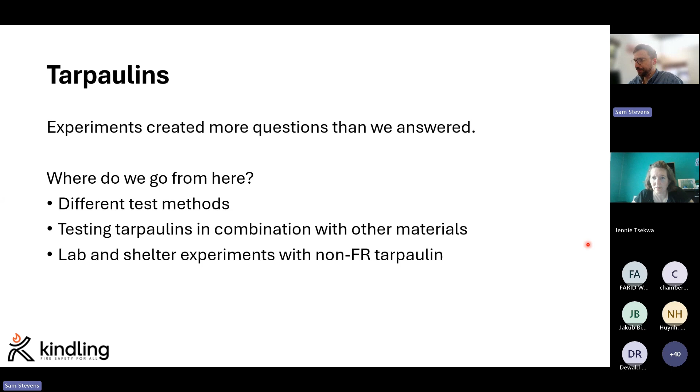I realize time is swiftly moving on. Great, I have 2 slides left. This is one

that again, people on the call are going to come at from 2 very different angles. So I want to talk about what the current fire safety guidance is for the humanitarian sector. Those of you who work in that space, I'm sure you will be very, very familiar with the Sphere Handbook. Those of you that are practicing fire engineers or researchers are maybe going to have a very different opinion of this as a document.

So the Sphere Handbook is a document that advises on all manner of features of humanitarian camp design, shelter design. It includes guidance on fire safety. I'm sure many of you are very thankful for that guidance. There are fire engineers on this call that are used to working with fire design codes that are hundreds of pages long, that have stuff to do with evacuation and smoke control and alarm systems and stairwells and all this complex stuff. So you are familiar with robust fire safety guidance.

The grand total of the fire safety guidance in the Sphere Handbook is 9 lines of text. Now that 9 lines of text, I'm sure, is very helpful for some of you, and I think there's going to be others of you on the call who are thinking, is that it? That's absolutely nothing. I'm not putting this here to critique the guidance in any way. It's just so that across the spectrum of people here, those of you who work in fire research can start to realize how underserved this area of fire engineering is.

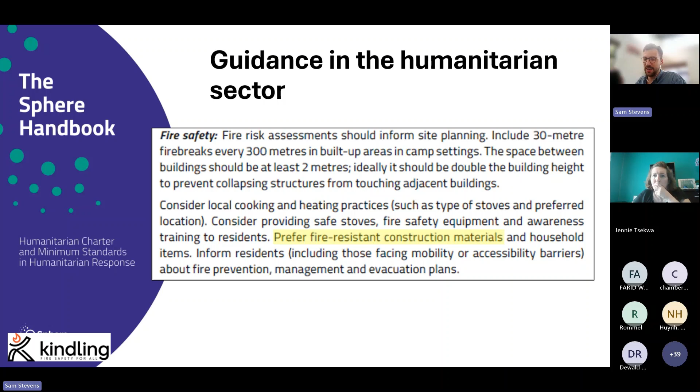So I'd like to end on just kind of what have we done with this data, and what's next for Kindling in sort of different projects or different outcomes we want from this work. So if you go to our website, you'll find that we published a series of short videos kind of covering the experiments. They were produced by a professional videographer from South Africa who is absolutely phenomenal. He's done an amazing job of capturing the work visually. So if you want a more visual view of the experiments than I could provide here, I highly recommend those videos.

We've taken the sort of technical parts of this work to some conferences, and we've also run what we're calling Fire School, which has been a training program for residents in Cape Town, where a lot of things are covered. We touch on the experiments. We obviously don't go into maybe the level of scientific detail that you'd expect here, but we do try and relate some of these quite complex fire safety concepts in a nice simple way. So talking about impact of materiality, impact of door and window locations, and things like that.